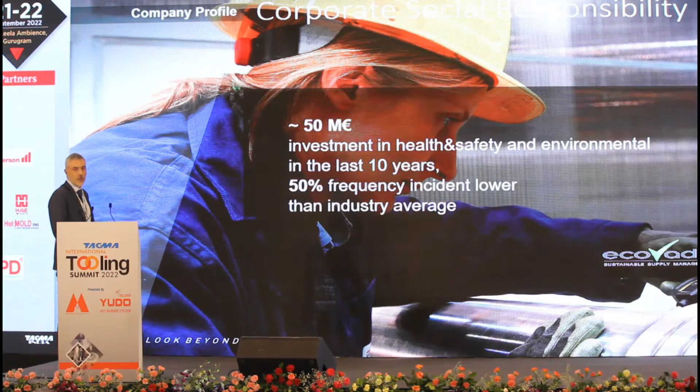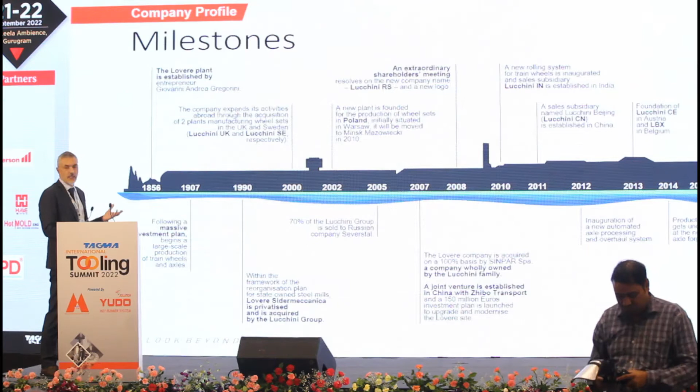Some information about the story of the group. This is a timeline of the story of the plant where I come from. The plant is located in North Italy, in the region of the lakes, between Milan and Venice. And as you can see, the story of the plant begins a very long time ago, in 1856.

But the story of the Lucchini family managing this plant starts in 1990, when the Lucchini family buys from the Italian government several different plants in Italy for the production of different steel long products. In this action, Lucchini family also buys the Lovere plant, which is specialized in the production of rolling stock, wheels, axles, and wheel sets.

You can consider Lucchini RS one of the most important players worldwide for rolling stock, but also in the production of forgings and castings.

Between 2005 and 2007 we got a very important change, because Lucchini family sold all the other plants in Italy to a Russian company and decided to keep only the plant of Lovere.

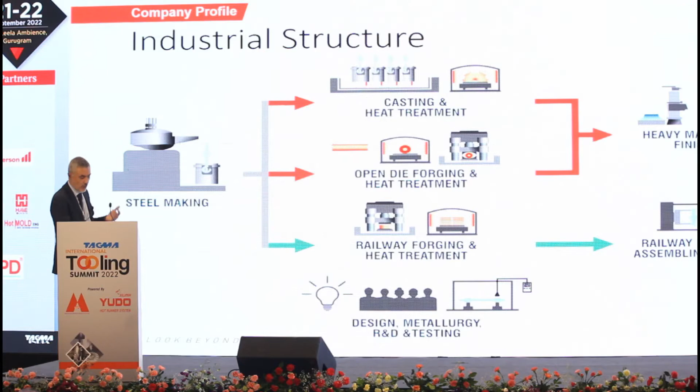Divisions: Railways for wheels, axles, tires, complete wheel sets, and after sale service. Second division, forging and casting: ingots, castings, forgings and bars, tool steels, and after sale service.

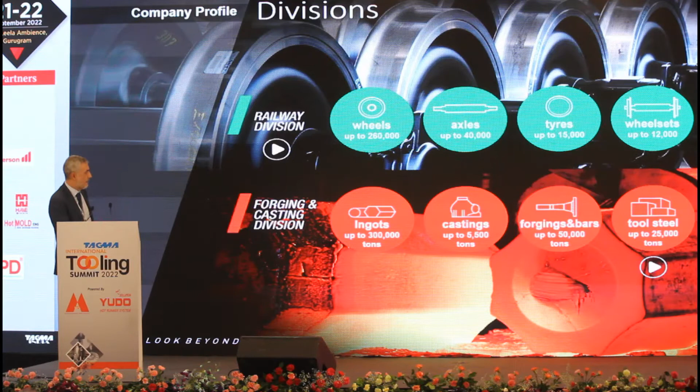Some information about the application for rolling stock. Lucchini can produce rolling stock for high-speed trains, commuter and metro, locomotives, low-floor trams or tram trains, and freight.

Forging and casting application, of course, most important is oil and gas and petrochemicals, both for casting and forging, or power generation, high-tech engineering, shipbuilding, and cement works.

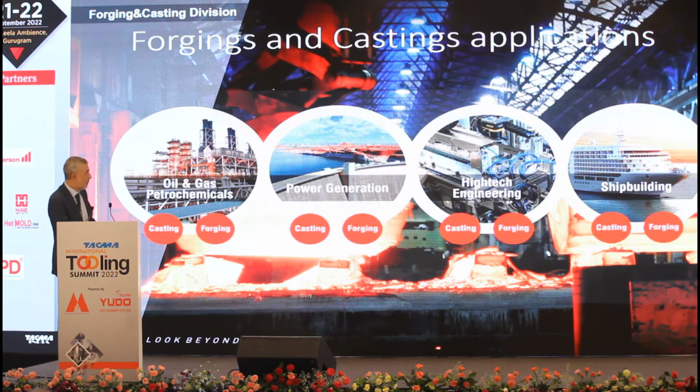Then in the family of the forgings we have tool steels, and to complete the production we have round bars in mechanical engineering steel grades.

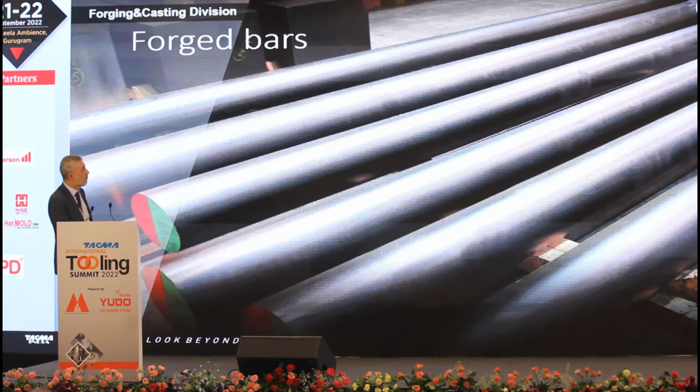Some information about the steel line. We have one electric arc furnace with a capacity of 60 tons, a power of 40 MVA, 2 ladle furnaces, 2 tank degassing for vacuum oxygen degassing. Our technology to pour the steel is bottom pouring.

Then we have 1 ESR plant for the electroslag remelting procedure. And we can produce carbon, alloy, stainless steel.

We can reach liquid steel for casting up to 300 tons, which is a very big weight. And the production of the ingots, we can produce round, square, polygonal ingots with weight from 2 tons up to 82 tons.

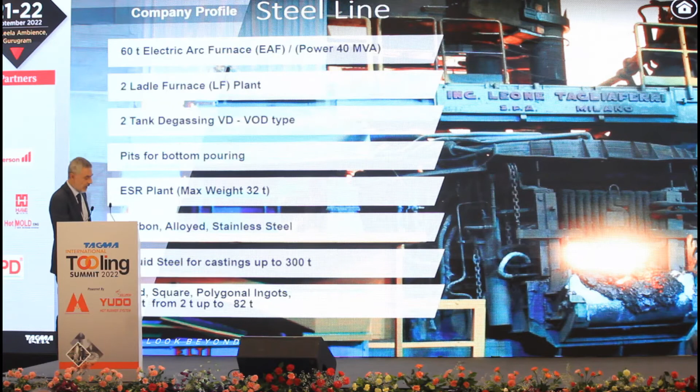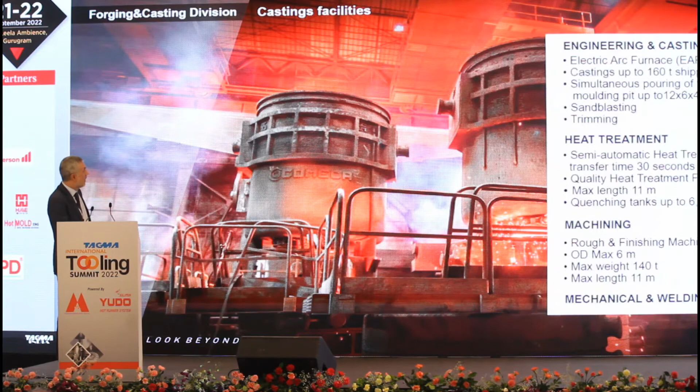Some information about casting facilities, but I will skip all these slides. Forging products. Some information about forging facilities, which is most interesting also concerning tool steels. We have 3 forging presses, from the smallest 3,200 tons up to the biggest 6,000 tons power.

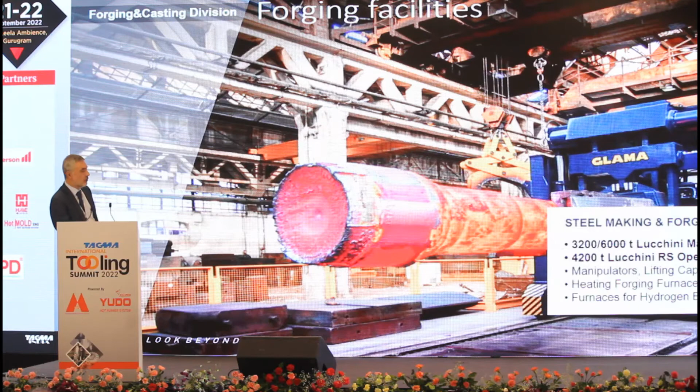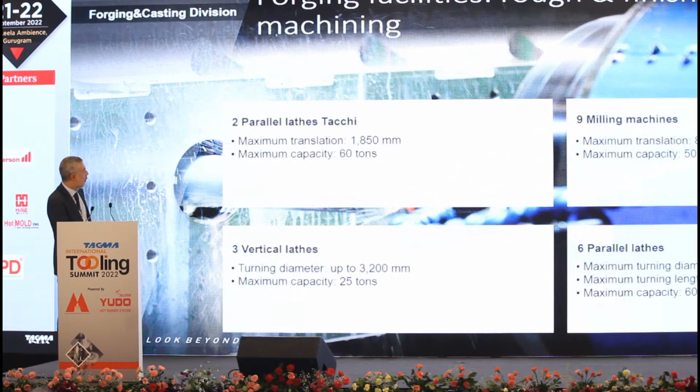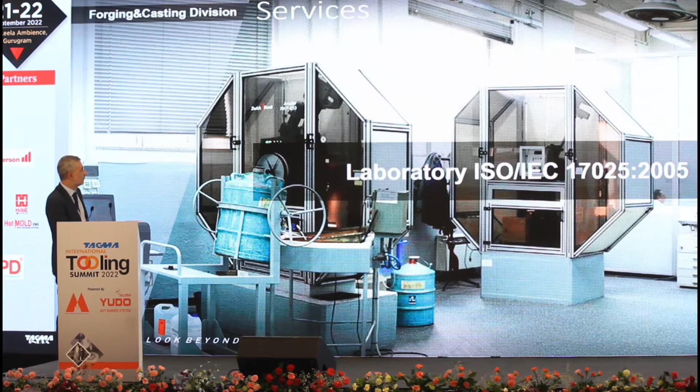Heat treatment, quality heat treatment, and all the facilities and equipment for the machining and the milling of forgings and tool steels. Laboratory to carry out all the required tests and non-destructive tests. All the certification for steelmaking, casting and forging, so all the main certification according to the international norm.

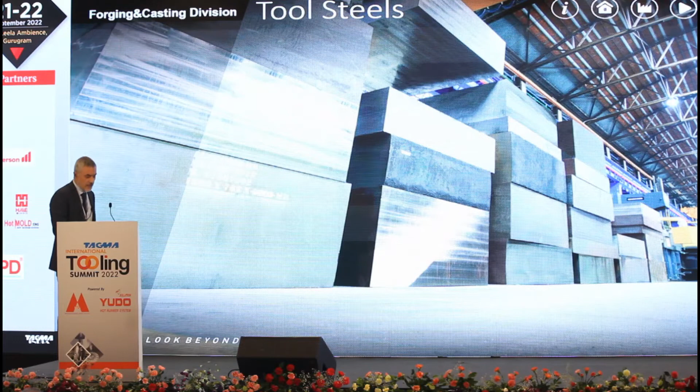And now we are coming to our point concerning tool steels. We have 3 brands. Keylos is the brand for our plastic mold steel grades. Beylos is the brand concerning hot work steel grades and also high-end plastic. And Eskylos is the brand we use.

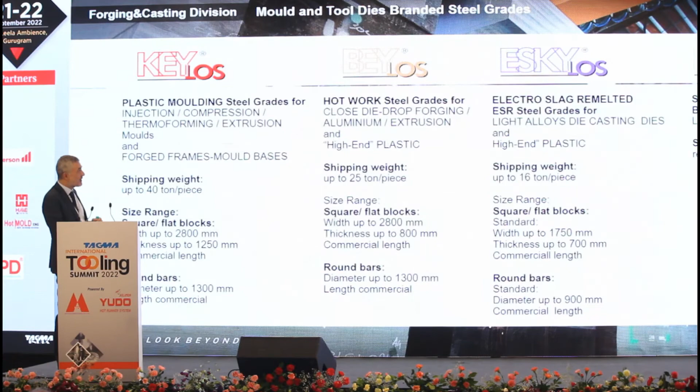The key factor of the ESR process is to allow a very high solidification speed that is impossible to achieve by conventional ingot. So for die casting application, this is one of the most important aspects.

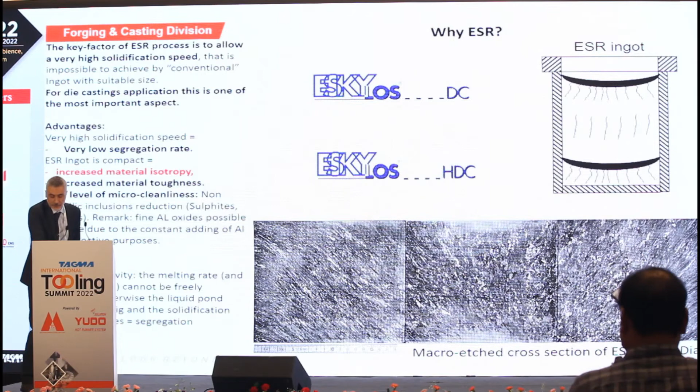Advantages: very high solidification speed, very low segregation rate. ESR ingot is compact. So by this way, we have an increased material isotropy, an increased material toughness, high level of micro-cleanliness, so non-metallic inclusion. Of course, we have to accept some disadvantage, which is lower productivity.

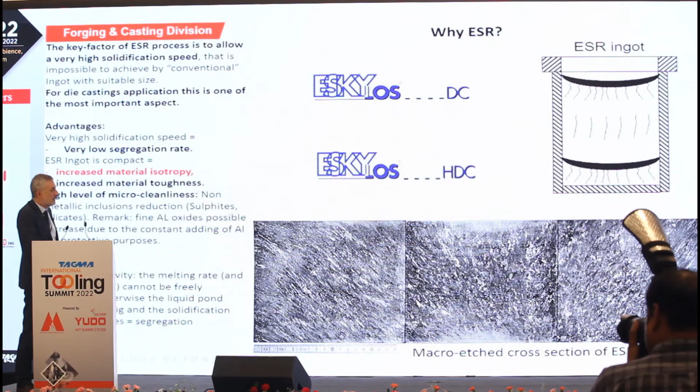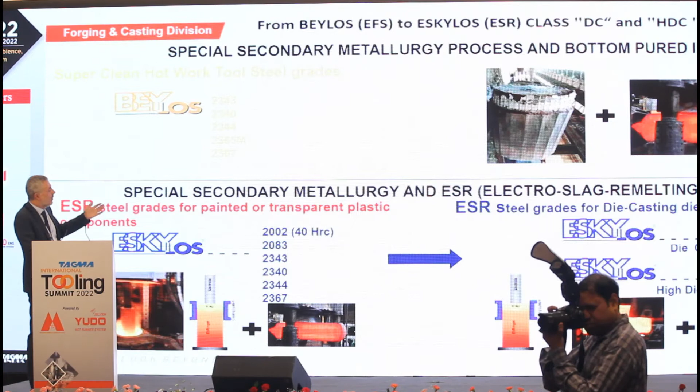But if we want to produce quality steel, we have to accept this disadvantage. So, in order to achieve the top level quality for steel grades for die casting, we start from the extra fine structure ingot, conventional ingot.

We go to ESR in order to decrease the segregation, and then adding some specific operation in the forging, we can improve more and more the quality of the product.

EFS, extra fine structure ingot, ESR ingot, from ESR ingot go to the forging and applying some particular operation during the forging and during the heat treatment to get the best possible quality for our steel grades 2343, 2344, OptiMo and HiMo for die casting.

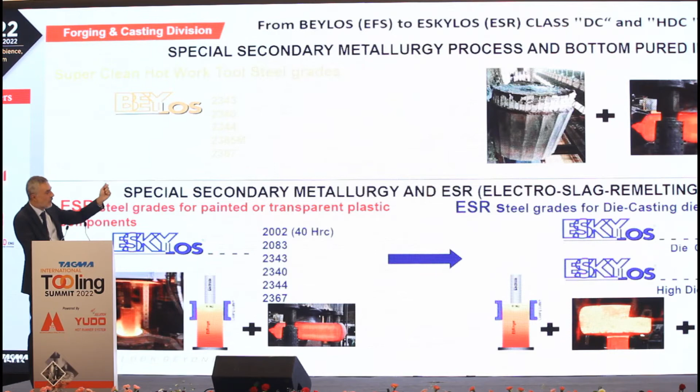We have been working also on the chemical analysis, focusing on the level of sulfur and phosphorus content in order to keep them very low, because they can have a negative influence on the performance of the steel.

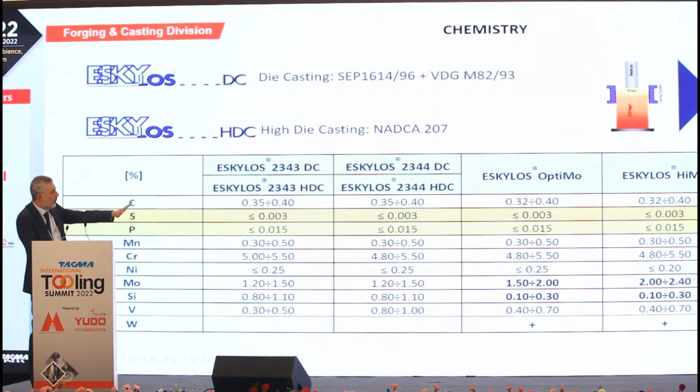And then moving from the standard steel grades 2343 to 2344 to our new proposal for light alloys die casting, ESKYLOS OptiMo and ESKYLOS HiMo.

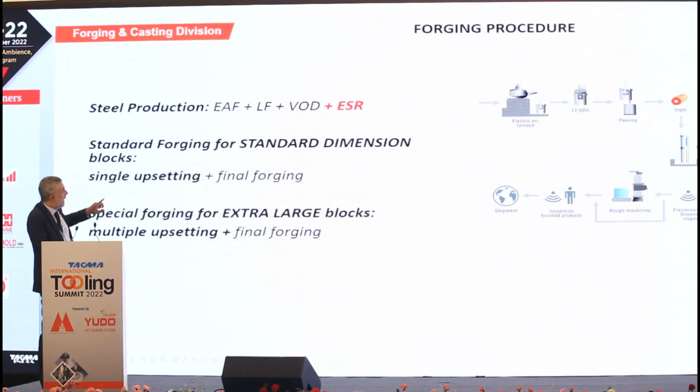So steel production, again, electrical furnace, ladle furnace, vacuum oxygen decarburization, plus electroslag remelting. And then we add some particular procedure for the forging.

So we go from standard forging for standard dimension blocks by single upsetting and final forging, to the special forging for extra large blocks, for multiple upsetting plus final forging.

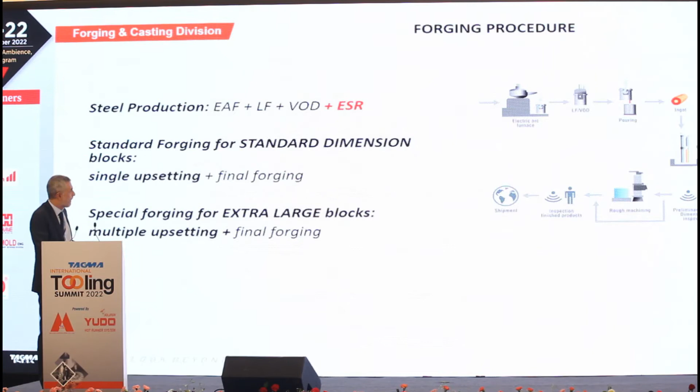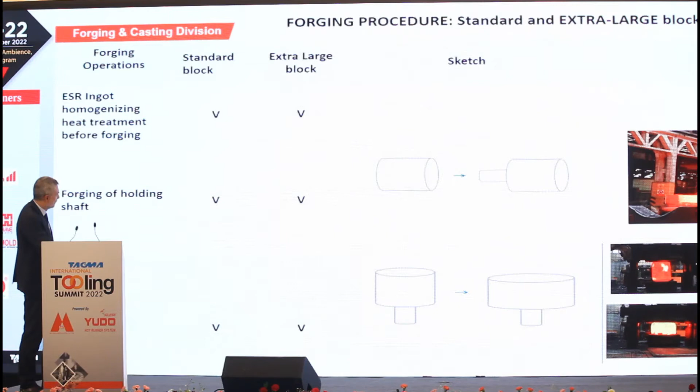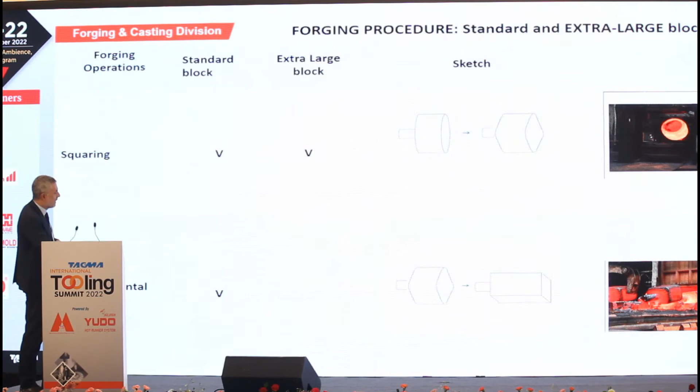Then for both forging of holding shaft, upsetting for standard and for extra large, then squaring, and in case of standard block, after squaring, we go for final horizontal forging. In case of extra large block, after squaring, we go for second or multiple upsetting, then we go for cubing, and then for final forging.

So, by this way, which are the advantages from ESR together with this particular forging procedure? We start from a smaller ESR ingot, okay? And by the forging procedure for extra large block, by the ESR ingot, as small as possible, we can get better segregation rate and we can increase the isotropy.

By the extra large forging procedure, we apply higher forging ratio, minimum 1 to 5, maximum 1 to 9, without considering the upsetting steps. And we can increase the heat checks resistance and get fine grain dimension.

So extra large block dimensions, we are able to reach maximum width 1600 by thickness 500, or maximum width 1750 by 450, or in case we need more thickness, we can reach 700 millimeter thickness.

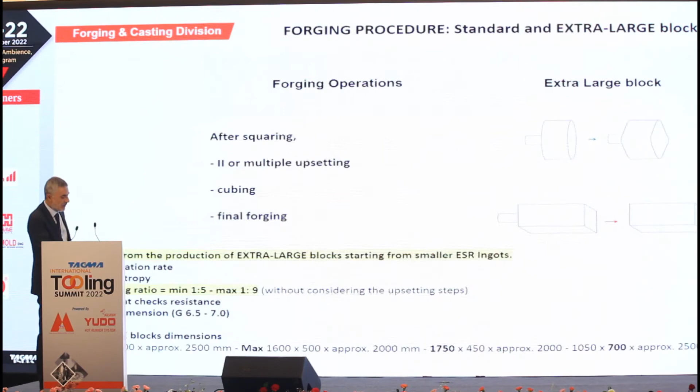Never turn upside down the block. Never switch the width of the block with the thickness of the block, because in this case you are changing and turning upside down the fiber forging. Okay?

Always it is important to mark on the surface of the block for the tool maker the surface from which to start the operation of machining to manufacture the die. And never should the ratio between thickness of the block and thickness of the piece be more than 2 to 1. If I have a block of 500 millimeters thickness, it's better to avoid slicing a thickness of 100 millimeters from such a big block for a die.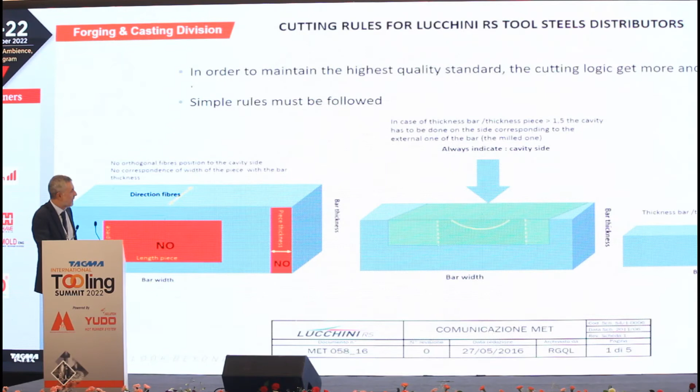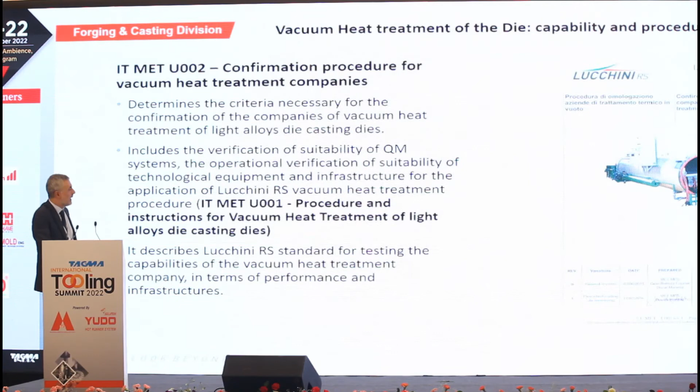Two main partners, of course, in Europe. One is TAG, an Italian heat treatment company, and the other is HOT, a German heat treatment company.

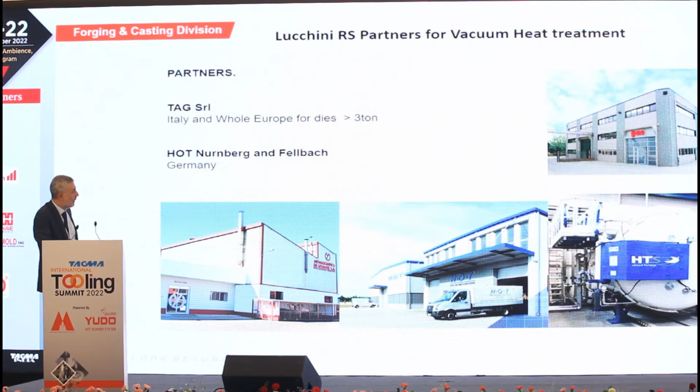Some information about the brands now. 2343, 2344, Eskylos OptiMo, Eskylos Hi Mo, all in ESR.

So 2343 is the most utilized tool steel in the die casting industry in Europe. Very good chemical balance, so it can be produced in a very wide dimensional range. Excellent ratio of warm strength and toughness, and it is quite heat treatment friendly. So big size tools can be heat treated in vacuum hardening furnaces with limited crack risk. This steel can be used for all aluminium magnesium die casting dies in all sizes.

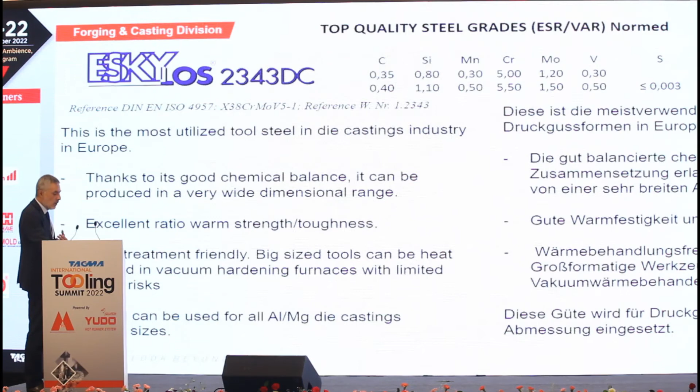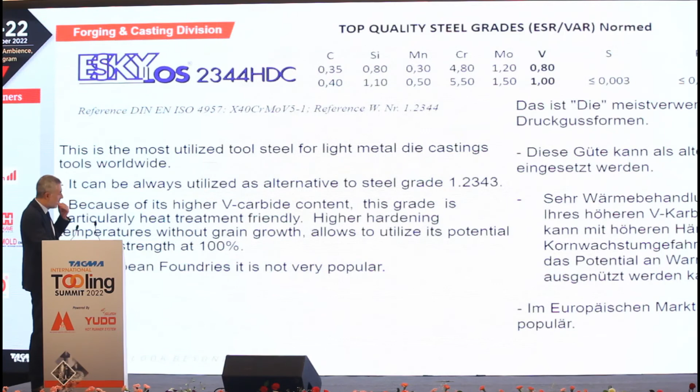2344, which is the most important here in India for your use and for your culture, can always be utilized as an alternative to 2343, which is more known in Europe, because of its higher vanadium carbide content it is particularly heat treatment friendly. Higher hardening temperature without grain growth allows to utilize its potential in warm strength at 100%. In Europe it is not so popular.

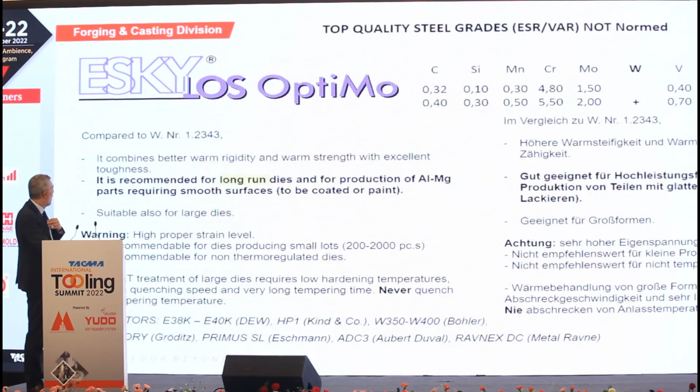Now our specialties: Eskylos OptiMo has been developed starting from 2343, decreasing the content of silicon and adding some content of tungsten. It combines better warm rigidity and warm strength with excellent toughness compared to 2343. It is recommended for long run dies and for production of aluminium magnesium parts requiring smooth surfaces to be coated or painted. Also suitable for large dies.

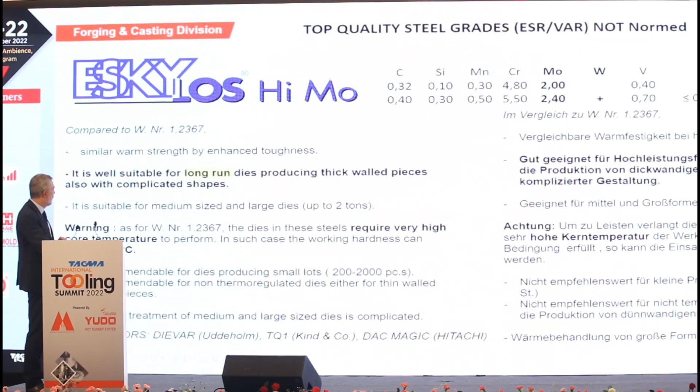And then we have Eskylos Hi Mo, which has been developed starting from the experience of 2367. It has got similar warm strength and toughness. It is well suited for long run dies producing thick wall pieces, also with complicated shapes. It is not recommended for thin wall aluminium pieces.

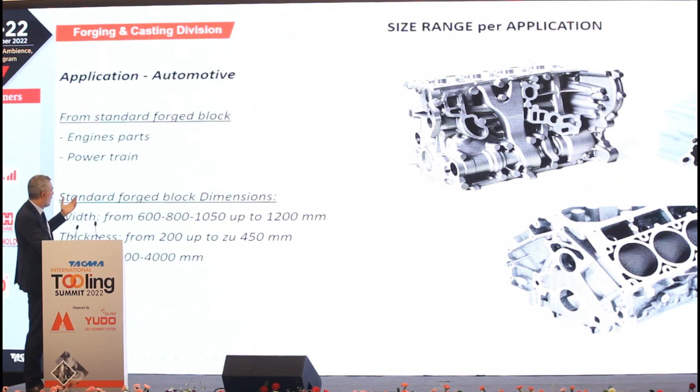Size range per application: for automotive, from standard forged blocks we go for engine parts and powertrain, which is combustion engine. Standard forged block dimensions up to 450 thickness.

For structural aluminium magnesium parts, we suggest extra large forged blocks for body parts, joints, e-mobility, and other pieces.

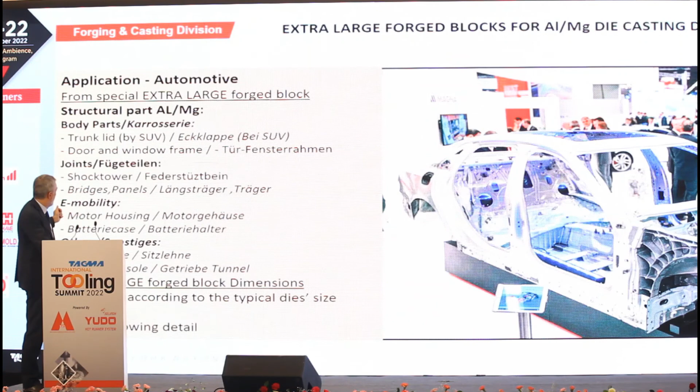Just some examples: for trunk lid, typical die dimensions are 1600 to 1750 by 350 to 450 thickness. So this is why we need extra large blocks.

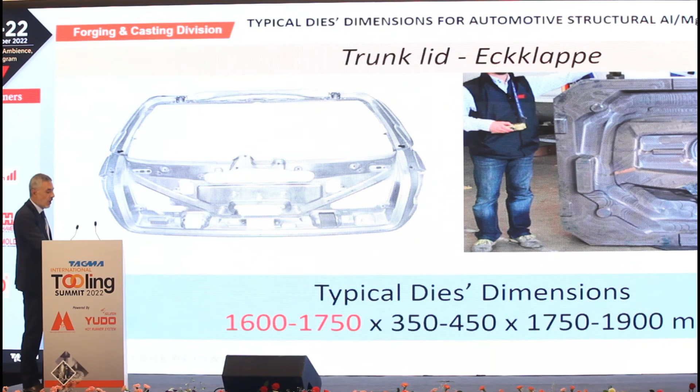Door and window frames, again, the width of the die, so the width of the block, is very important. So we need extra large blocks.

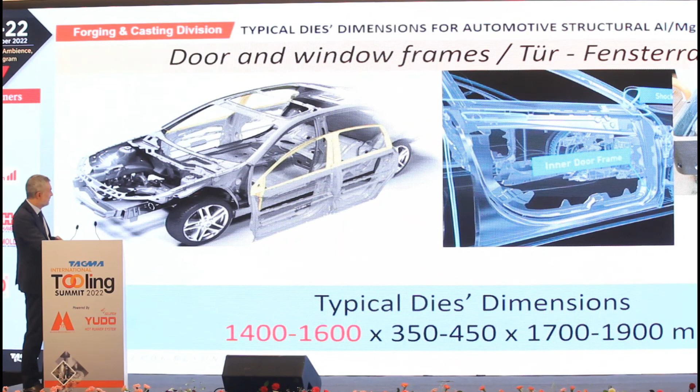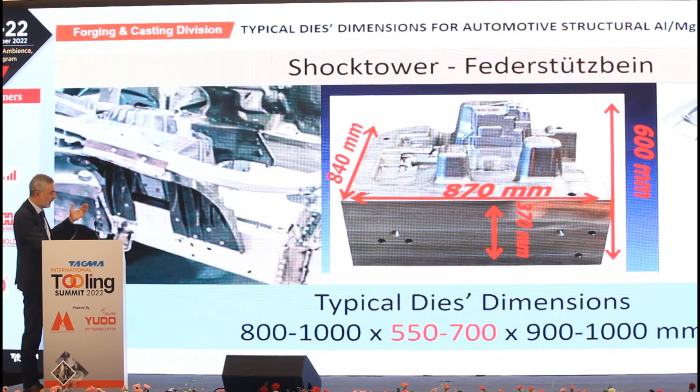Shock tower, this is more concerning the thickness we have to reach, not the width, so focus on the thickness. And also bridges and panels, this is more standard dimension, but we go for these dies from extra large forged blocks.

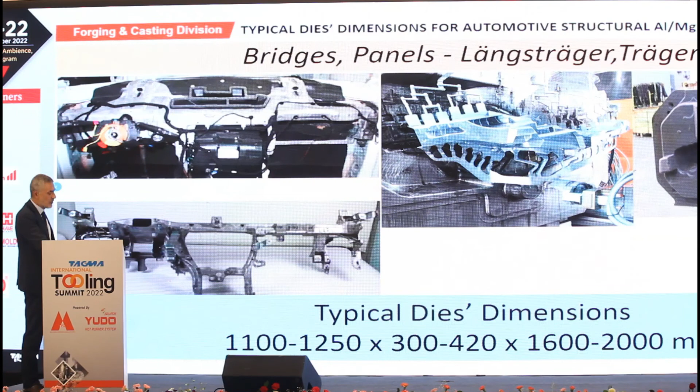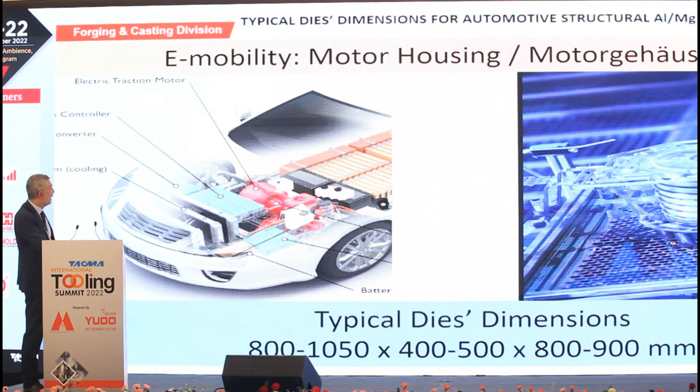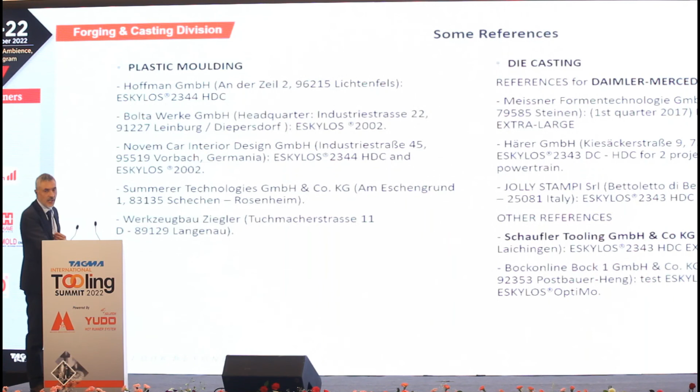E-mobility, okay, for battery housing, motor housing, and some references for die casting. We got some projects with Daimler Mercedes in Stuttgart, and I will mention we are currently working with Schaufler Tooling in Germany for some Tesla project.

Thank you very much for your time. Sorry I am late.